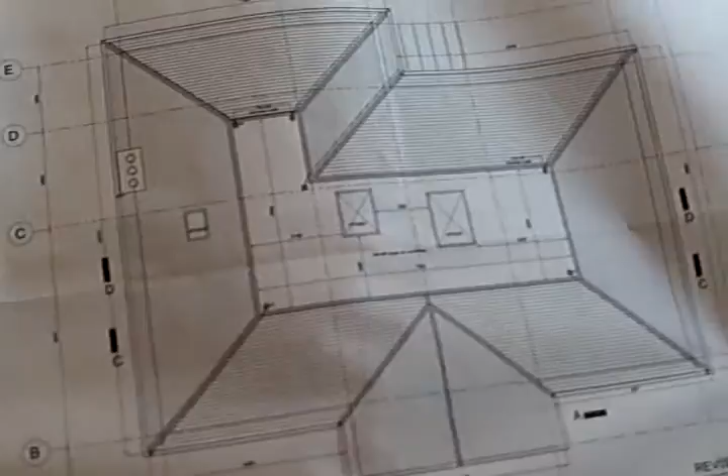I used AutoCAD 2005 version, and as you can see, we worked on making the house larger. So originally the house was that much, and then we knocked it down and added all that space, the front and the side and at the back, to increase the bulkiness.

And this is some of the landscape. We have more landscape drawings, but just to give you the flavor of the project, this is our neighbor as well, number 29, which I designed both of them, and I worked on both of them, knocked them down and enlarged them, and produced the drawings and the specifications and contract documents. We used JCT 80.

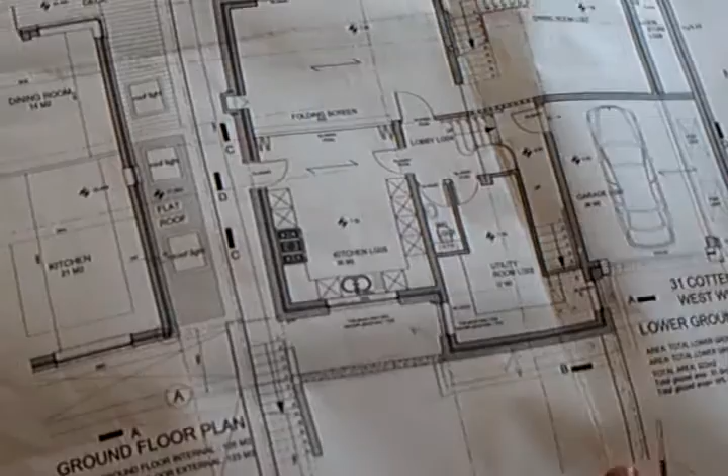Just quickly, I'll go through the drawings to show you what we did. This is the chimney. Please show the chimney over there. That's the interior of the chimney.

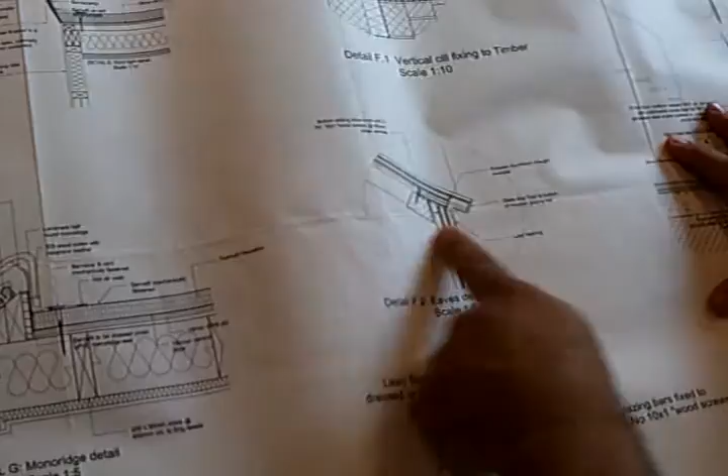Right, if you can come back here, please. These are the details: eaves detail to timber, mono ridge detail, and Lonsdale glazing bars. And this is the section, 1 to 20. All these I produced with my colleagues in AutoCAD.

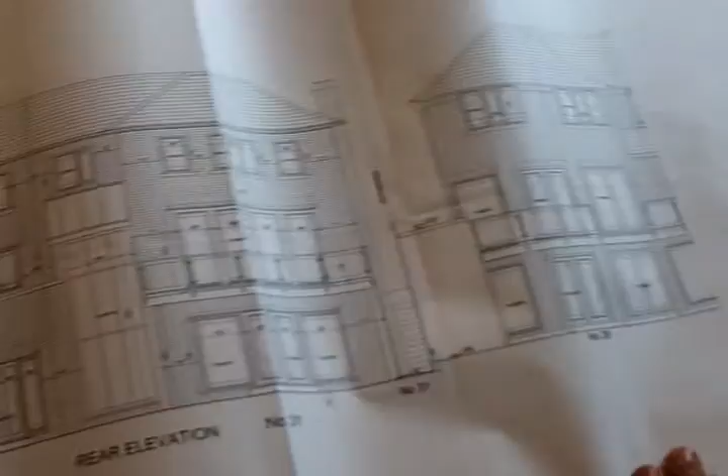This is the back elevation of the building, rear elevation. As you can see, the conservatory here increases the amount of natural light, and also makes it warmer in winter, so we reduce the gas bills.

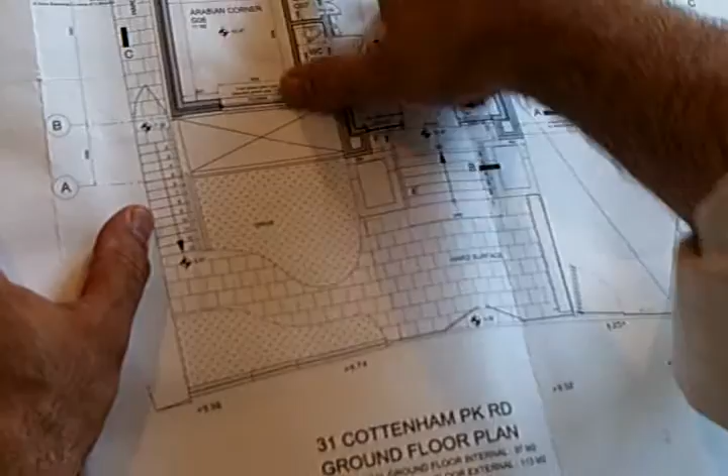Right, I'll just take it quickly. One of the stages, we decided to have a bedroom here, study, living room, Arabian corner, and entry hall. And the staircase, we changed it quite a few times. As you can see, in the end, we finalized it with an organic shape. We managed to convince the client to do it more organic. It cost a bit more.

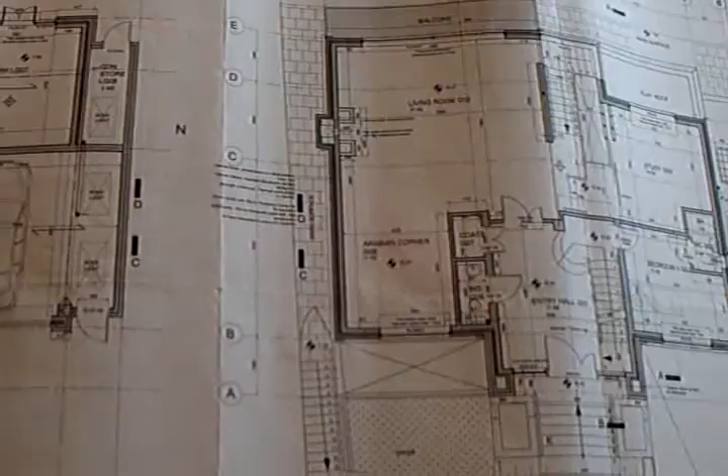And the kitchen, I'll hopefully be able to show you later on, was produced and manufactured by Pedini. We were discussing Bulthaup or Pedini, but in the end the client decided on Pedini.

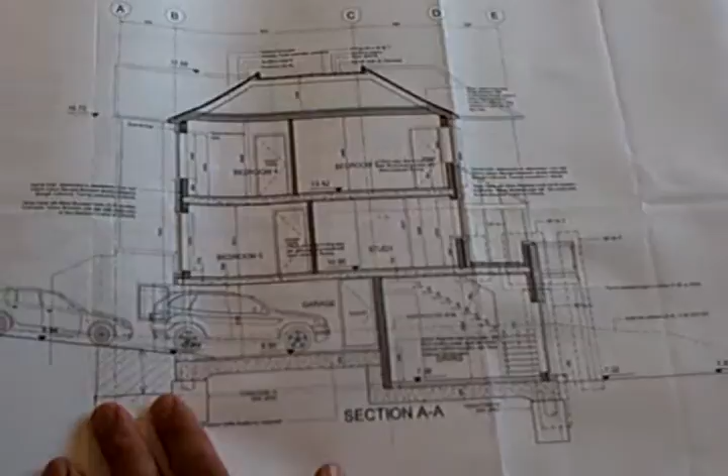As you can see, this is the Everdure Caltite concrete that we used. We used pile foundations, about 8 meters. We had to really use piles because there were a lot of water tables below the ground, so it was a wise thing to do, I think, in the end.

And this is half the specifications really on these drawings, but I produced about 400 pages of extra documents as specifications.

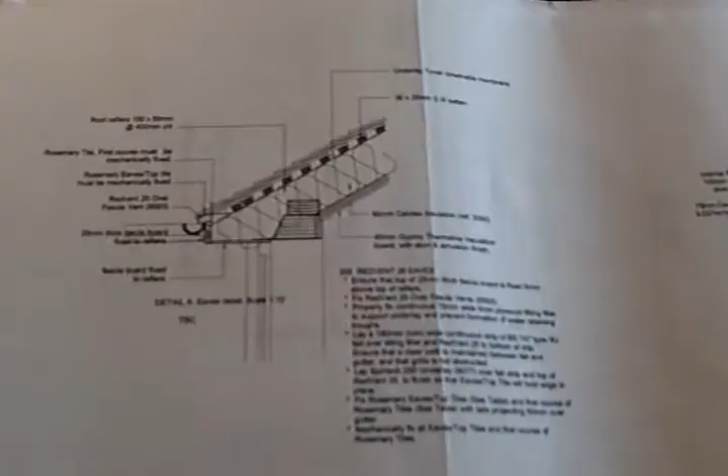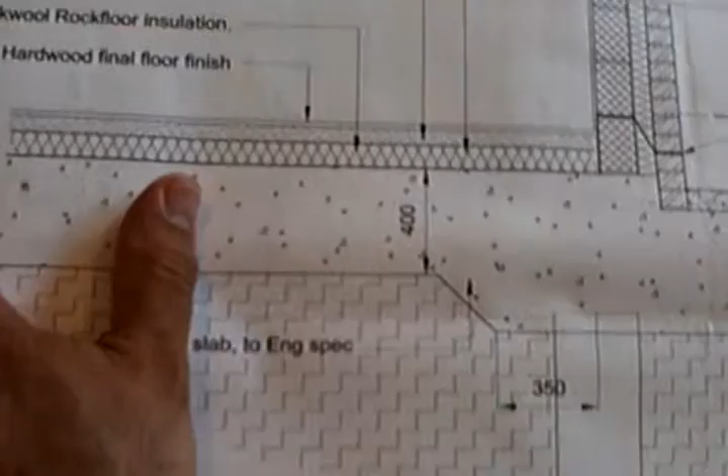I'm going quickly through the details, and I'll just show you some sections. As you can see, lots of details and tanking and waterproofing. I made sure that everything is clear for the contractor. I'm quite precise with my work, and we revised them many times. We got building regulation approval, conditional one, and then slowly we removed the conditions.

Just showing you the kind of drawings that we produced on this project. We did the same thing to number 29.

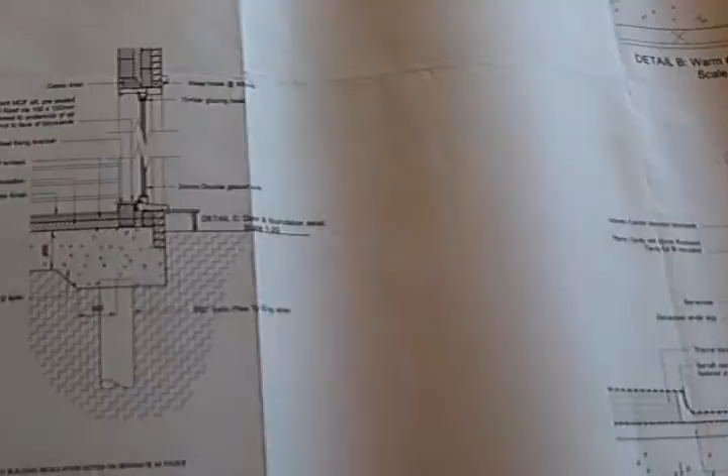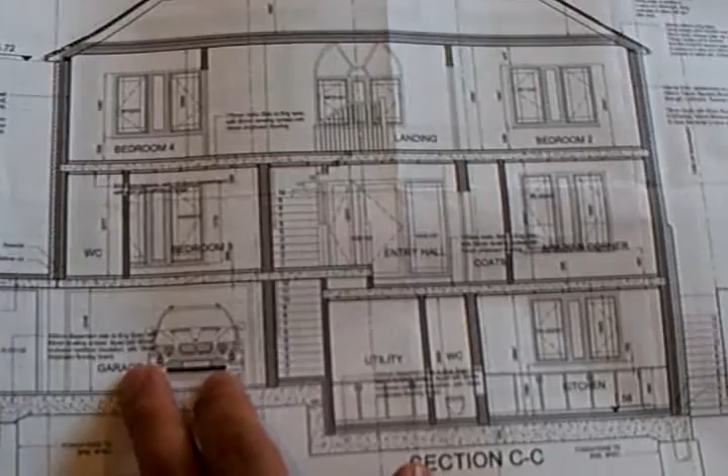Yeah, that's section CC, as you can see, showing you the windows. If you come closer, that's the window which is on top of the entrance, and that's the staircase which is next to the entrance, and there's a garage and the bedroom. As you can see, we managed to have like 6 bedrooms in this house. What's the window called? Well, this is the landing area.

Right, as you can see, we've done revisions up to E. Another section.

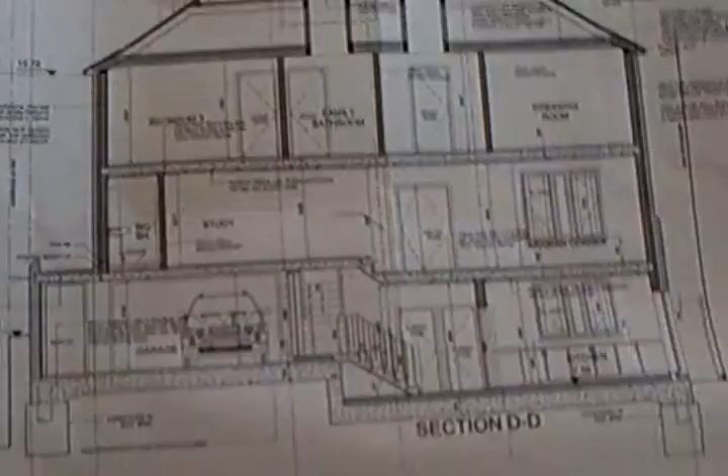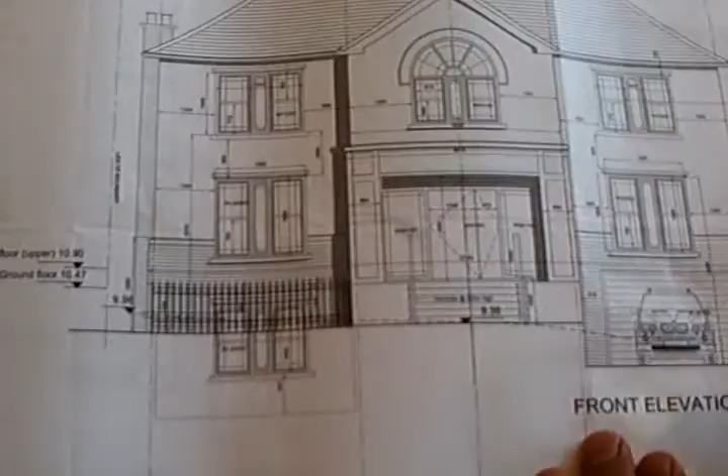We tried to build some kind of a gate, a nice gate, but the planners did not allow us because the highway agency said that it's too dangerous because there is a turning, a curve on this road, and it's too dangerous for the car to come out without being seen by other cars, so they did not allow us to have a gate. We tried so hard, but the highway agency were very difficult.

These are some of the structural engineer details which I inspected on site and coordinated, and I corrected and made sure that everything was working. I have photos as well, about 200 photos. For this I might produce a video to show you as part of my CV.

This is the drainage layout as well. I worked on this with Malik Walsh and coordinated with them all the manholes and inspected them as well on site.

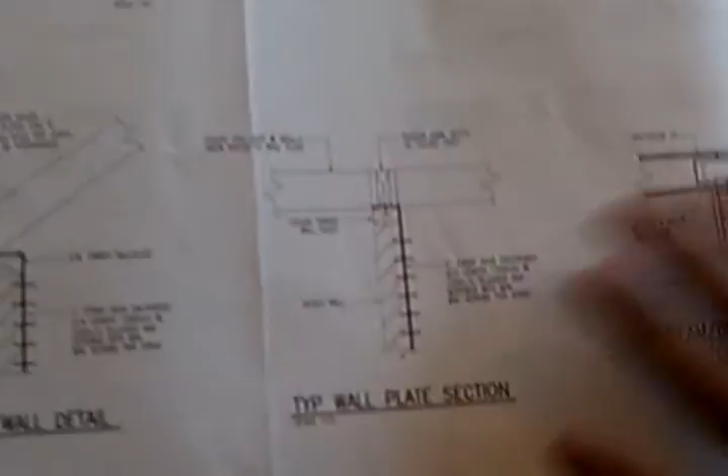I'm quite precise with my work. I like to inspect and check that everything is going fine, and these drawings I marked in red many times to make sure that all the sizes and all the grid lines and all the sections are correct and in the right places, so no mistakes. So it went very smoothly.

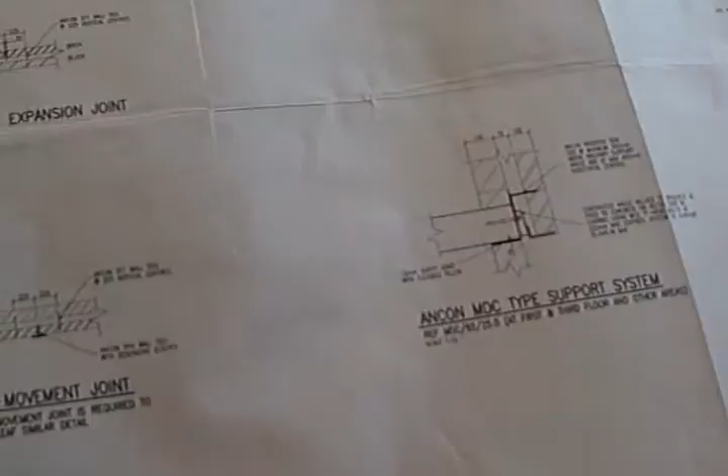And here are some of the Ancon connections to make sure that they are all correct.

And the roof structure, I wanted to have a ring beam in the roof, and the structural engineer said yes, why not? As you can see here, there are some steel elements in the roof. It was quite windy in this area, and it gives more stability. As you can see here, part of the ring beams at the top right.

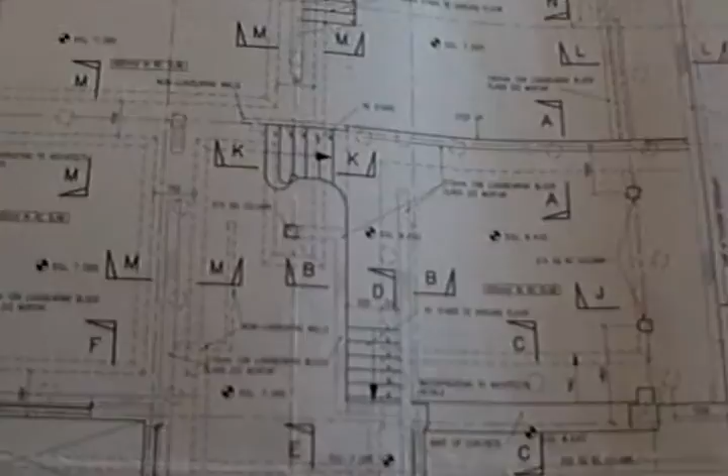More drawings. As you can see, all these drawings save you a lot of work, a lot of headache on site. And the structural engineer said there was no need to produce all these drawings.

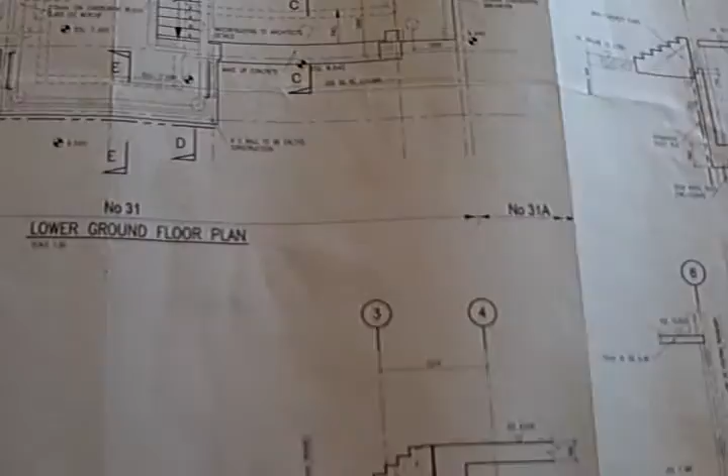I told him no, the client is quite important. It's better that we show every part for the contractor, especially we have piles and we have pile caps, and it was a hill, as you can see, in a section. And that's it really.

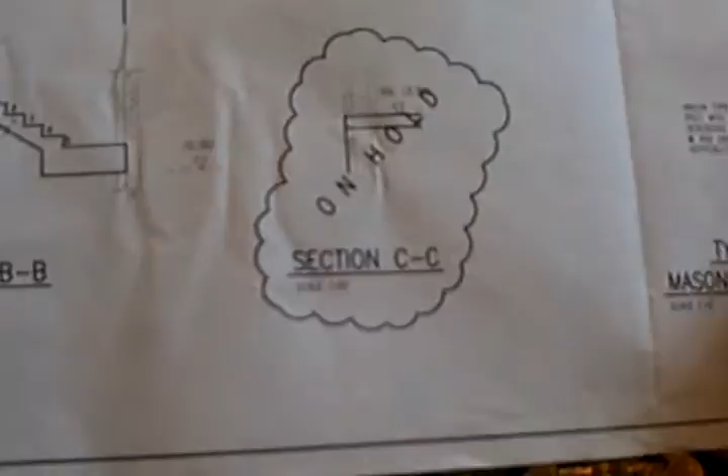I don't think there's any need to show any more in this video, and I hope that you enjoy it and that it gives you an idea about my skills in architecture, structure and design. Remember that my background is in teaching, so I'm very thorough in my work, very accurate, and I make sure that everything works, and that's what makes the story quite successful. Thank you so much for listening, and have a nice day.